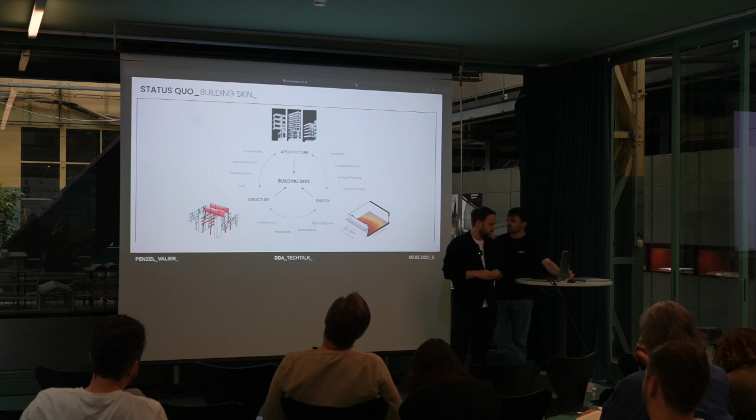So for the first demonstrator, let's say, we jump into the project for the Swiss National Television. There we have a new campus, which is already built. It's in Leutschenbach, close to Zurich. And there we had the challenge that we have a quite big cantilever of the building.

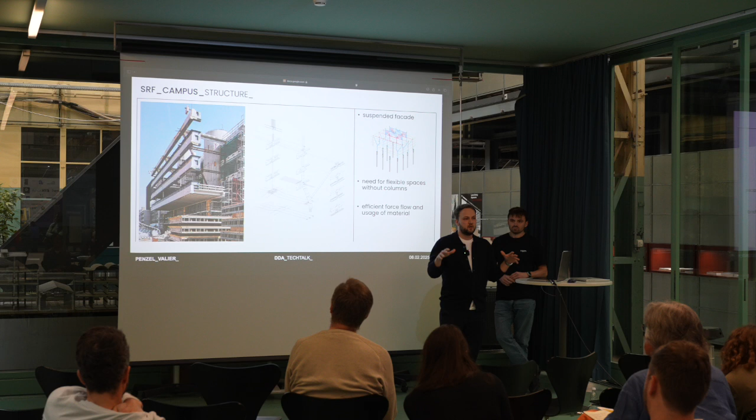And we created this suspended facade or suspended structure, which can also take off the use of forces, much more optimized in a tension way with the steel structure. Therefore we could, on one hand, build the building with less material, but on the other hand, we could also create flexible spaces on the inside, without any columns or structures, which was needed for the television part.

But also, if you take a closer look at the building, we have quite challenging heat management. They have very high internal loads of heat. Therefore, we had to adjust the facade so that we can use it as a cooling element. So the building is less insulated than usually in Switzerland, just because we have so many internal loads.

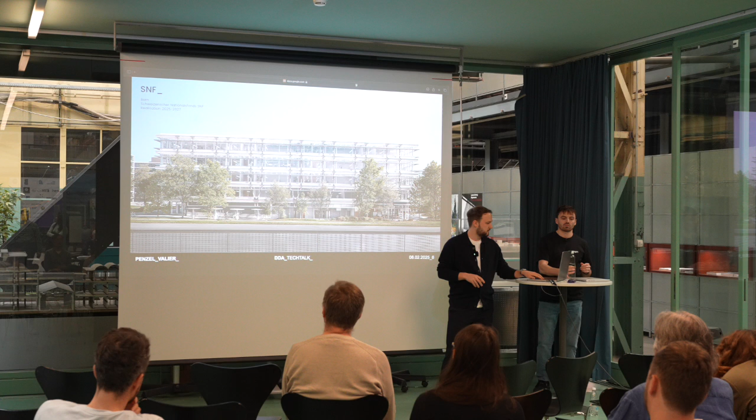Another example or demonstrator would be the new building for the Swiss National Fund, which will be located in Bern. There we had the challenge that we have to have very flexible office spaces.

So therefore we took the structure on the outside. We created this external, let's say, exoskeleton, an external structure for very flexible inner office layout.

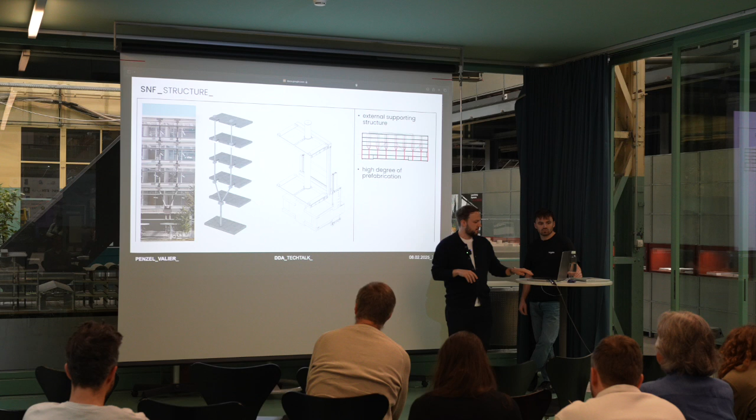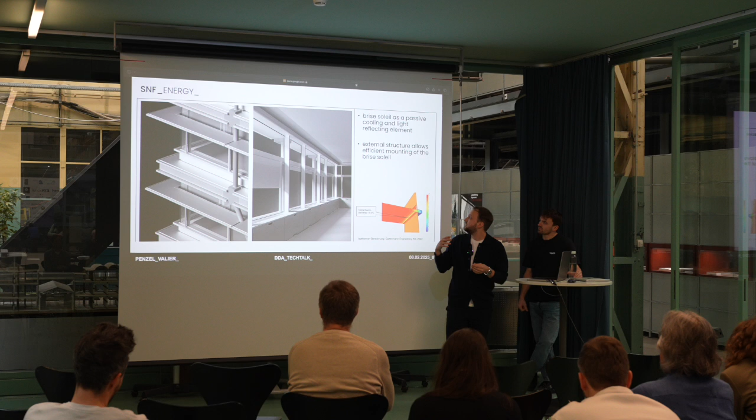With this external structure, it was also possible to add another element, which is a brise-soleil, which on one hand reflects light on the inside, and on the other hand it's a kind of heat management system, a passive architecture element for heat reduction.

A third example, just to cherry pick some of the examples in our practice, is the Campus Horw, which is located in Lucerne, and will be built in the next few years. Right now it's in the planning phase.

There we go more on the top, and we have this atrium, and on top we have this structure where we use carbon pre-stressed concrete. With an algorithm it was possible to find the most optimized solution in terms of, on one hand, the structure for minimal concrete usage, but on the other hand, it was also possible to use the structure as a light guiding element.

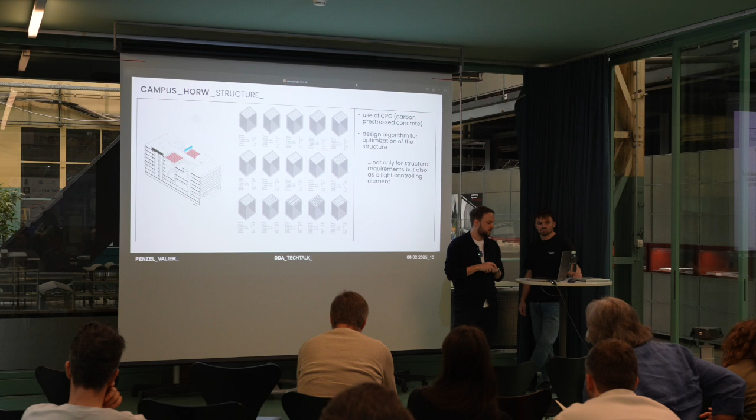So we had different influences for this structure, and additionally, we loaded the structure with these solar tracking mirrors, which are then also guiding light into the atrium.

So there we have very specific, bespoke designing principles for those buildings. And the challenge is really to have different stakeholders on those buildings, different planners, and to bring them together, working on one single part of the building or one single member or whatever.

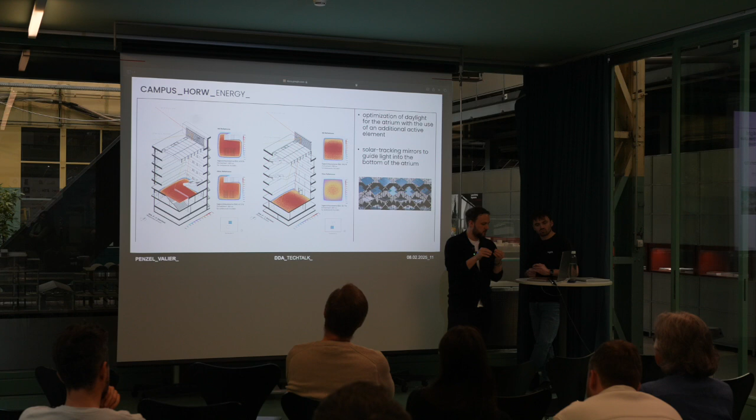And therefore we try to create new processes. On one hand, we automated a lot of planning processes so that we can make quicker iterations. And on the other hand, we have to speed up in the way we design and bring those functions together.

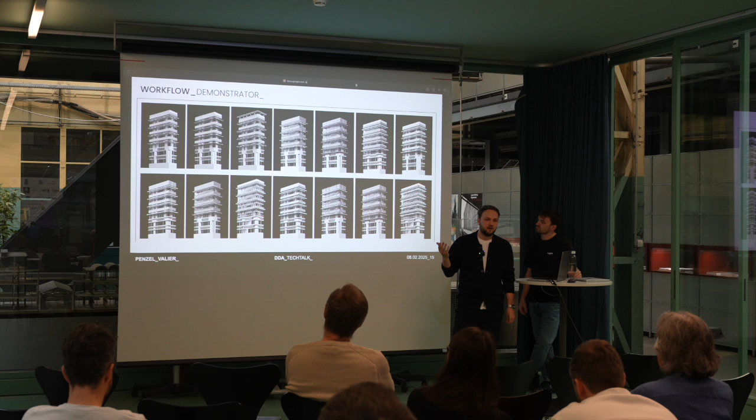We also need to have more informed design decisions, and that's where we need to go. We need to be able to draw all that information together and find the optimized solution for that specific problem, because what we found out through the different projects is it's really about the project.

So if you want to optimize, you cannot generally optimize things because they're very kind of tailored and bespoke. And I think that's also where Martino can give you more kind of deep dive information into certain processes to bring those stakeholders together.

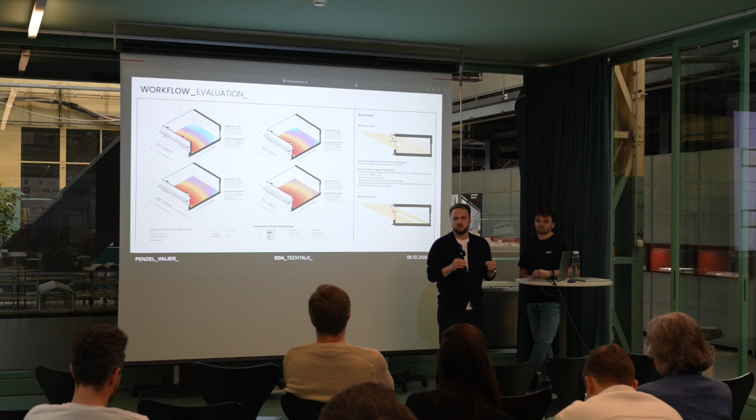As you just mentioned, it's very clear how complex constructions are becoming. It's very hard to keep all stakeholders in the same place, make them work together, understand all the different aspects that need to be analyzed and understood in order to be able to really optimize buildings. So the question we asked ourselves is, how can we make that possible?

If we want to really automatically optimize construction projects, we need a way to simulate, to analyze thousands of times over the whole lifetime, over the whole planning phases. And why isn't that happening today? We believe there are two main blockers, one being the low quality of 3D models, the heterogeneity of the models. It's very hard to find two models that are exactly the same under the same standard. And this, looking forward, won't allow AI-powered optimization to really use all the technologies that we have today.

The second one is the lack of a single platform where all stakeholders can really work together and have access to tons of different analyses. Now looking at the first of those two problems, what we see is most of the projects today are planned in 3D. Those 3D models are completely different. Most of them don't even reach the minimum level of quality needed for analysis. So there are inconsistent types, missing names, wrong assignments, missing rooms. We have seen a lot.